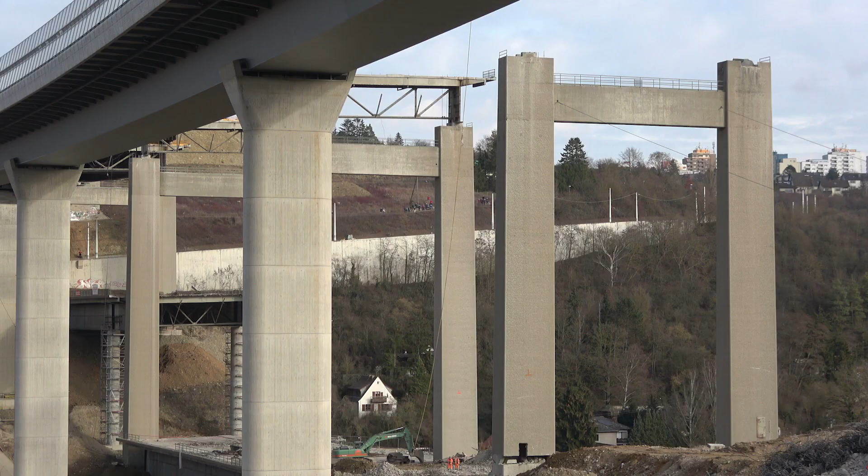Imagine bridge columns that you see around when you drive. All of those are monolithic, cast-in-place elements. So these elements have very limited tolerance to deformation from any hazard.

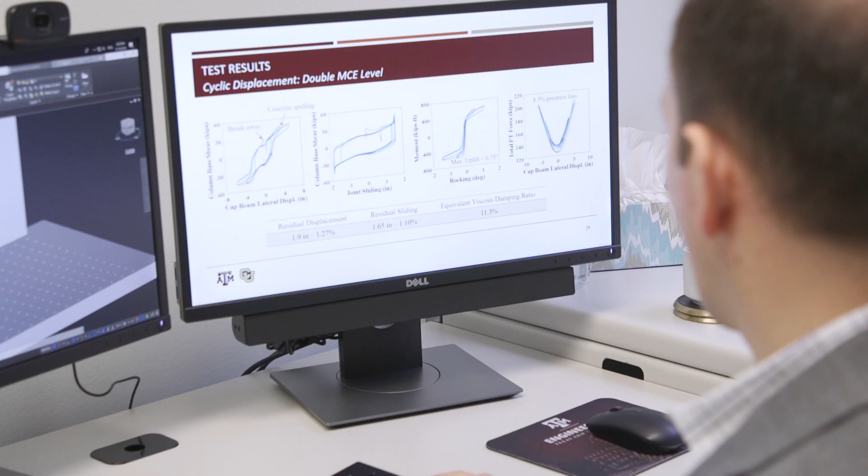Earthquakes, in our case. What we're trying to do in this research is introduce new response mechanisms within a column design so that we can accommodate these kinds of deformations without damage.

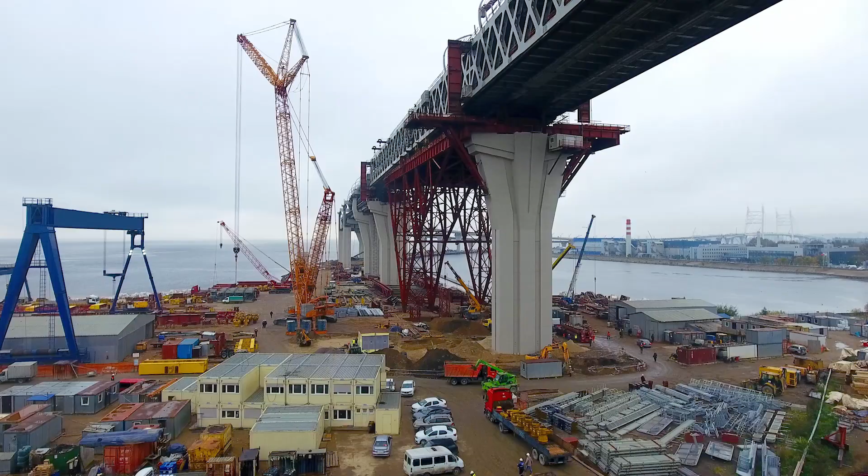Compared to conventional cast-in-place systems, where the columns can be a single pour of concrete, so you have solid elements, rigid, that are very resistant to motion.

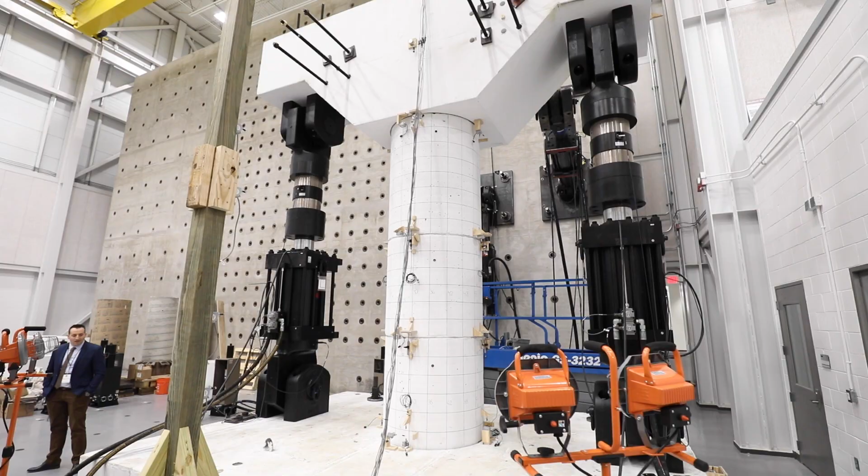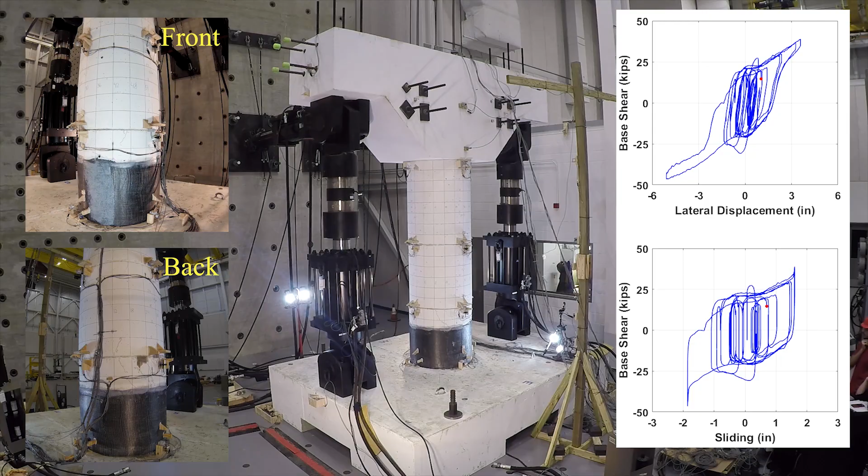Here we have a totally different design, where the column is broken down into segments. Essentially, the bridge column is already in pieces. So you hold these pieces together using tendons, and then you have specially designed joints along the height of these columns.

We allow those joints to exhibit small, controlled sliding. That sliding adds to the deformation capacity of the system. So you have a rigid column where if it moves a little bit, it gets damaged and probably collapses. And then you have a column that can move a lot without getting damaged.

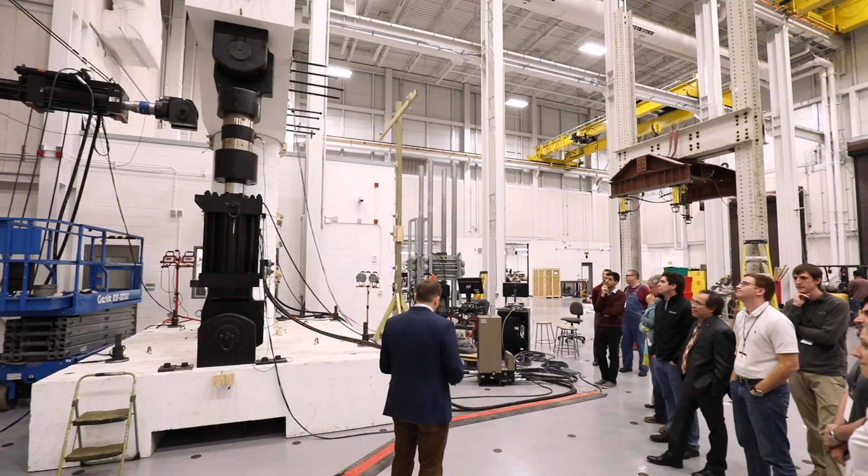The whole idea of having these response mechanisms is to add to the capability of the system to deform without getting damaged. That can be a game changer in how we design bridge columns.